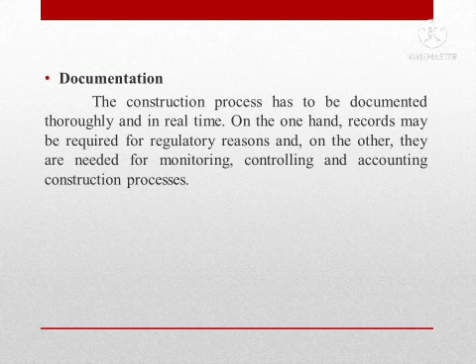Coordination. It cannot be assumed that effective communication processes will exist in temporary construction project organizations. The division of labor and responsibilities as well as the exchange of information and the workflow within the project must be planned, implemented, and controlled. The construction process has to be documented thoroughly in real time. On one hand, records may be required for regulatory reasons, and on the other, they are needed for monitoring, controlling, and accounting construction processes.

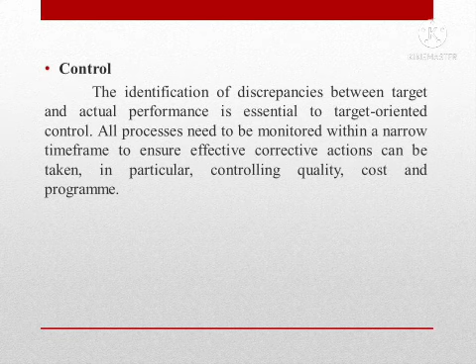The identification of discrepancies between target and actual performance is essential to target-oriented control. All processes need to be monitored within a narrow time frame to ensure effective corrective actions can be taken, in particular, controlling quality, cost, and program. There is no completely comprehensive software tool available to deal with all the tasks involved in project management. A set of systems is usually needed. Common types of software for project management are designing software, project communication software, digital construction diary software, scheduling software, and cost control software.

Designing software. Designing software are computer programs and applications used during the design phase. It is used in the illustration of the building plans. It comes with ranges and aspects. These are the most popular designing software for civil engineering. The first is AutoCAD. AutoCAD is the most popular software in the civil engineering world, designed by Autodesk. 2D and 3D design, drafting, modeling, architectural drawing, etc. can be created by this software.

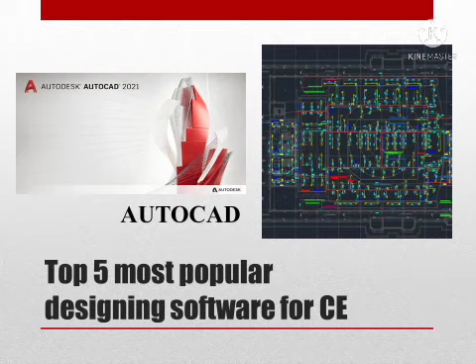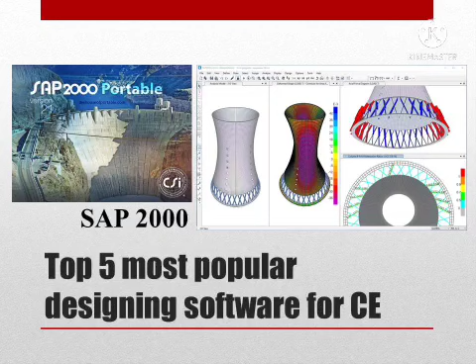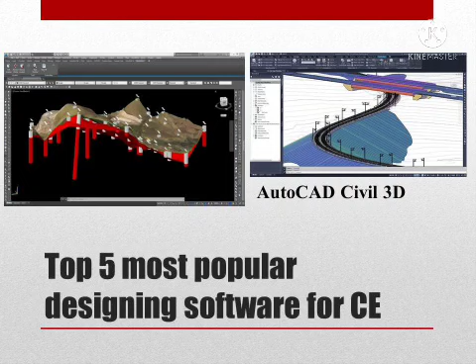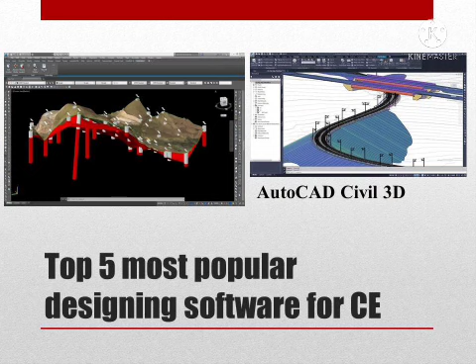Next is SAP 2000. It is the most popular structural analysis and design software in the civil engineering world, ideal for the design and analysis of any type of structure. Next is ETABS, also known as the Extended Three-Dimensional Analysis of Building Systems. It is the ultimate integrated software package for the structural analysis and design of buildings. Next is AutoCAD Civil 3D. It is a civil design and documentation solution that supports building information modeling workflows, or BIM. And lastly, WaterCAD. It is a robust and easy-to-use water distribution modeling program.

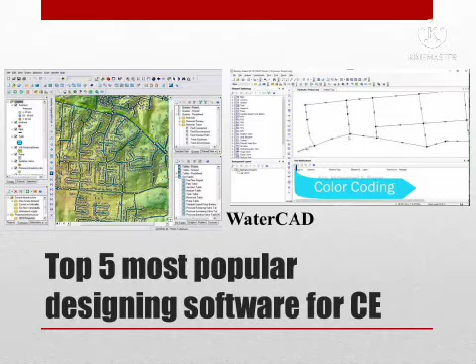Project Communication System. Project communication systems support the coordination of a construction project by providing a joint platform to all project members for collaboration and information exchange. Usually, the platforms are internet-based and data access can be governed by different user authorizations and privileges. The range of functions varies greatly. Some platforms simply provide a common data store, whilst others provide comprehensive media and workflow support. The top 5 communication or collaboration software.

Confluence. Confluence is a powerful platform that focuses on team ownership and collaboration versus individual work. From document creation to project collaboration, it's a game-changing way to share ideas, build community, and get work done. Zoho Docs. Zoho Docs is an online file storage and management software. Save all your images, videos, files, and documents and access them across all devices from anywhere and at any time. Sync your offline files to the cloud using Zoho Docs Sync.

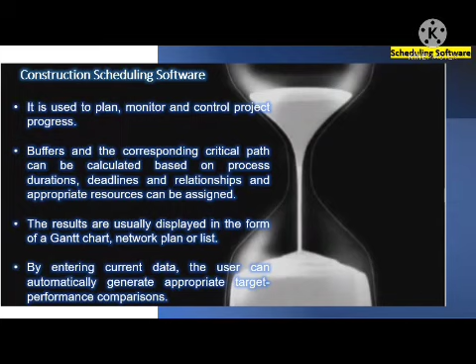Top mostly used scheduling software: Microsoft Project, Zoho Projects, Fast Track Schedule 9, Primavera P6, Workfront.

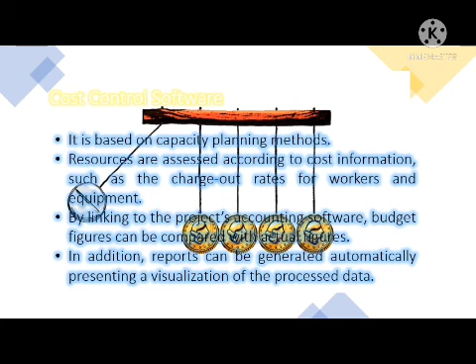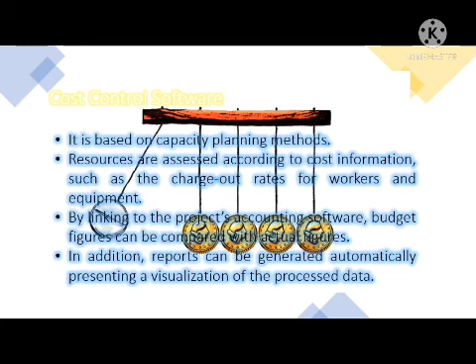Cost Control Software. Cost control software is based on capacity planning methods. Resources are assessed according to cost information, such as the charge-out rates for workers and equipment. By linking to the project's accounting software, budget figures can be compared with actual figures. In addition, reports can be generated automatically, presenting a visualization of the processed data.

Top mostly used cost control software. Structure automates job costing, payroll, work orders, purchase orders, receivables, payables, general ledger, and fixed assets for contractors. Contractor's Office: estimating, work orders, complete order processing, job budgets, accounting, job costing, job scheduling, labor tickets.

PubWorks: activity-based costing maintenance management system that manages projects, work orders, roads, bridges, facilities, etc. RS Prism is project lifecycle management software that delivers dependable forecasts and an accurate view of project performance. Synergist: job costing and project management system that helps agencies, consultancies, and in-house departments take control of their business.

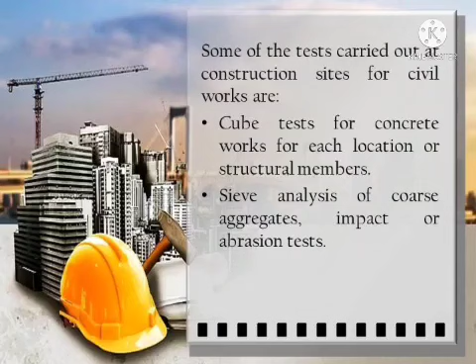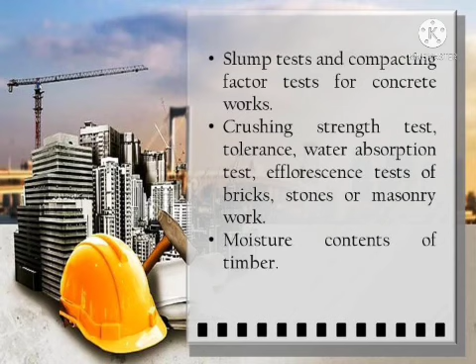Also the test for impurities of aggregates and sand, bulking of sand test for concrete and masonry, slump test and compacting factor test for concrete works, crushing strength test, tolerance, water absorption test, efflorescence test of bricks, stone, or masonry work, the moisture contents of the timber, the manufacturer test reports provided by the vendors for admixtures, reinforcing steels, and etc. Also, the other tests that are required by the contract documents for a project.

Registration for approval of samples. So upon the completion of the project or work, the approval of sample is very important, dealing with cases once a material has been approved or rejected by a client or contractor. Then it would serve as a proof of evidence of approval or rejection.